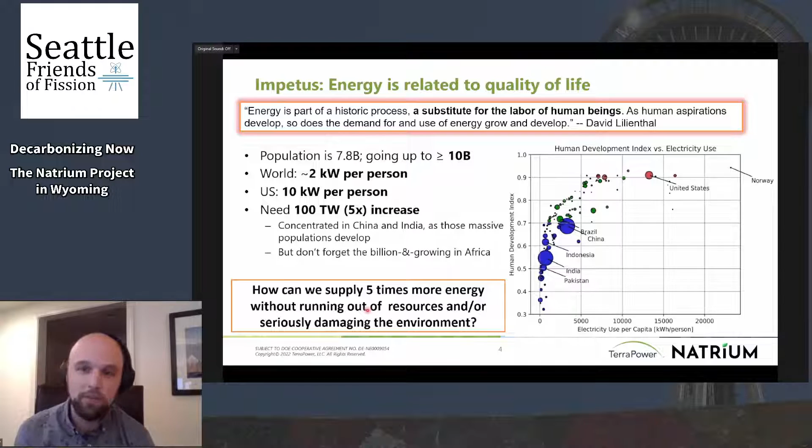When you look at the areas of the world with high populations that need improvements, you see places like China and India. But what you don't see here is also Africa, which is also a growing area that needs improvement. So our founding fathers really asked themselves, how can we supply a lot more energy without running out of resources and without seriously damaging the environment? They went off and thought about this for a while and really came up with nuclear energy, and this concept of a traveling wave reactor, which we'll talk about in a little bit.

So the primary goal of TerraPower's start was to look at the benefits of certain types of nuclear energy and figure out how we can deploy those to a product that is globally deployable. They came across the idea of this traveling wave reactor, which wasn't new, but was more theory than engineering solution. The traveling wave reactor is an extension of a breeder reactor, and so they started thinking about breeder reactors and what breeder reactors are. They have some advantages.

They have a long-term sustainability at the world scale from a fuel utilization standpoint. They can reduce fuel cycle costs with respect to both mining and the enrichment costs. And they kind of enhance your front-end proliferation resistance.

The downsides of a breeder program is that there's a high cost to reprocessing, and the reprocessing also increases some proliferation concerns. But with a breeding reactor, you do get a lot of advantages from the coolant type, and the coolant type from the breeder reactors we looked at is a sodium-based coolant. These sodium-based coolant reactors have low pressure, so they are inherently safe reactors because of that. They have high thermal efficiency.

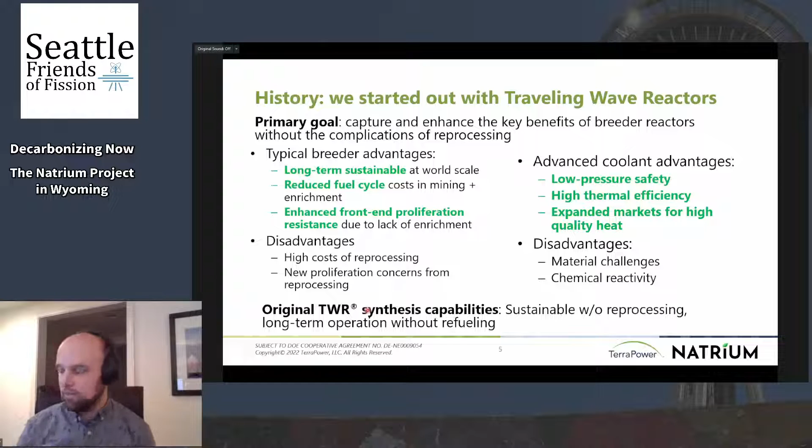So we kind of focused in on these breeder reactors, but we really wanted to take the advantages and not have any of the disadvantages. So we conceptualized this TWR as a breed and burn reactor. And so what is the breed and burn concept?

Well, it avoids reprocessing by basically taking the U-238, which is very abundant in natural uranium, and putting it in the reactor core such that it captures neutrons that are being emitted from the fission reaction, and that U-238 breeds into plutonium Pu-239, and then that Pu-239 becomes the fuel, which we then burn.

And as it moves into that dried region and burns, it is actually drying out the next region. And so this kind of traveling wave, if you will, of breeding and then burning the fuel is what the traveling wave reactor is based on.

And so we went off and looked at this technology for a while and figured out how to implement it using a sodium fast reactor core and reactor systems. And we do that through shuffling the fuel throughout the core throughout its life, maintaining some regions of the core that are breeding up this Pu-239, and some regions of the core are burning that Pu-239 as a fuel.

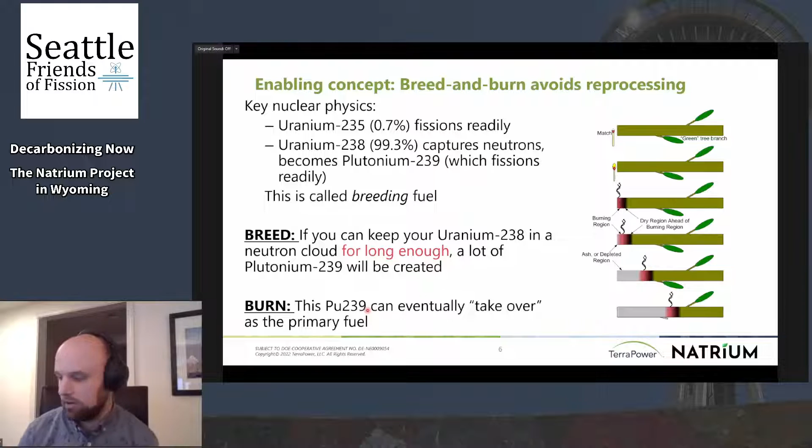Going back about 3 years now, TerraPower reached out and started working with GE Hitachi, which is a company based in Wilmington, North Carolina. GEH, as I'll refer to it going forward, has had a history of developing nuclear reactor technology and deploying it both locally and globally. They have been working on advanced reactors as well. So TerraPower and GEH formed a development agreement and co-developed the Natrium product.

And we really started over from scratch, trying to take the best elements of the traveling wave reactor and GEH's past reactor designs, but really focusing on the future energy markets and trying to design the technology to be very cost competitive and simple. We really wanted to design the product to have rapid constructability because we know that being able to deploy this technology quickly is important.

Current nuclear reactors have an issue with really, I'll call it bloated staffing levels. They have a lot of staff that costs a lot of money to operate. So we looked at trying to reduce the required staffing levels by being very conscious of staffing during design efforts.

And ultimately, we were able to operate at pretty high temperatures. And so we're actually able to gain a higher net thermal efficiency of our reactor. And this helps with the economic impact that we're able to make with this reactor technology.

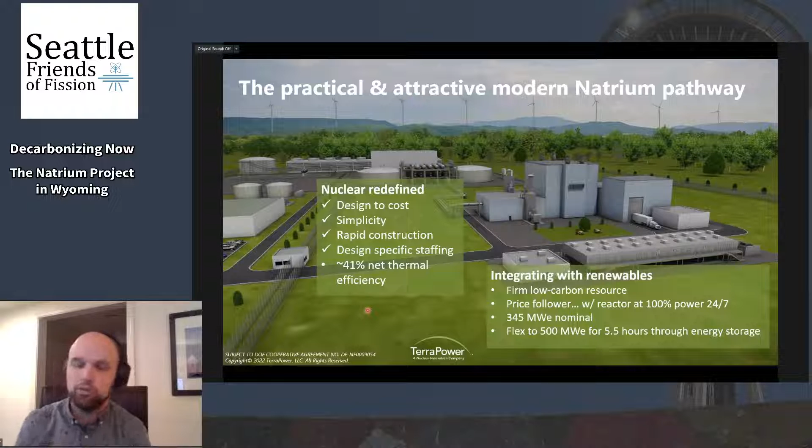So we came up with this concept a couple years ago. We started marketing it to utilities, and then along came the Advanced Reactor Demonstration Program. This is a congressionally backed program really focused on trying to get the U.S. nuclear industry back as a global leader in developing technology. So Congress decided to fund 2 reactor demonstration projects at a very aggressive level, and then a number of R&D projects below that.

So we put in a proposal with a really solid partner group, and we won it. And so this was about 2 years ago. And this program is really set out to demonstrate the ability to design, license, construct, and start up and operate this Natrium reactor. So the program covers all parts of that cycle. And we see it as a real opportunity to build the supply chain for these sodium fast reactors in the US.

And then obviously we are interested in deploying this reactor technology because we see it as a key way to lower emissions by really deploying a fleet of Natrium reactors. This demonstration program will get us our first unit. And then once we're able to demonstrate our ability to design and operate one Natrium reactor, we feel like there's quite a market out there to deploy more.

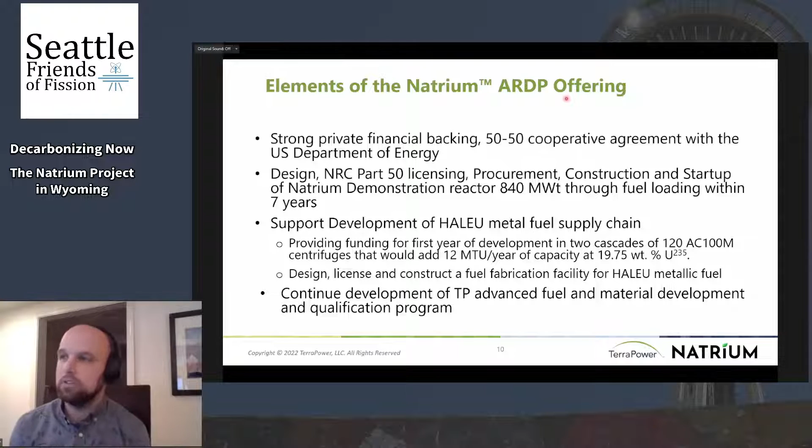And then we really see an opportunity to deploy this at a fleet level throughout the U.S. And so we see that the next step in the Natrium program is a fleet of commercial reactors, which we're demonstrating with the demonstration reactor being deployed in the next decade.

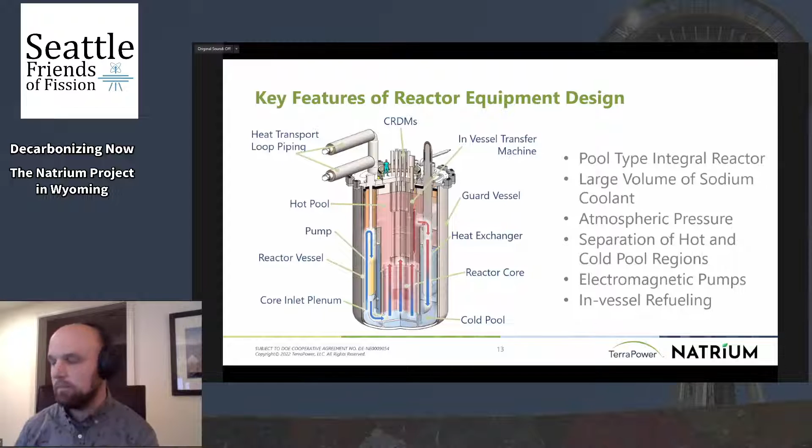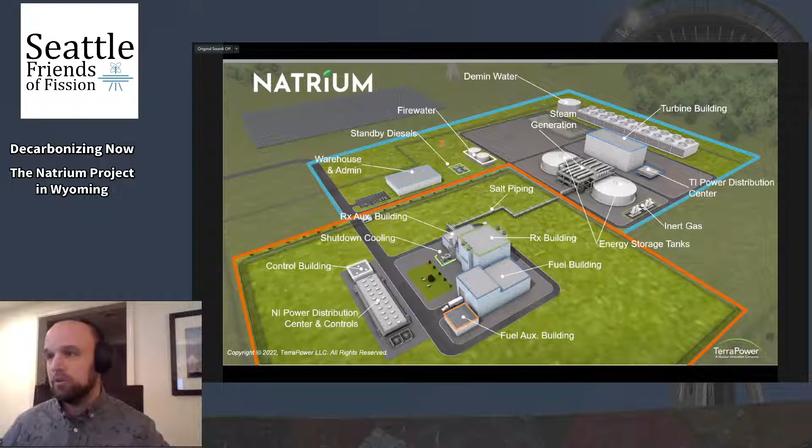And I think that's it. Also shown are things like warehouses and admin buildings. We've got standby diesels and fire water protection and whatnot. But this is the Natrium project, and this is what we're going to be deploying in Wyoming, and ultimately, hopefully, deploying elsewhere as a fleet application.

Wonderful. Let me see if I can get to some of the questions. Sure. So I see first one that has probably been answered by now. You're going to connect a steam generator was the question, and part of that was answered in YouTube. Yes, there's going to be energy produced. In fact, PacifiCorp is a partner in this project, so they're producing energy for a commercial purpose.

In fact, Carl, it's a great point. I'd like to maybe hammer it home a bit. Our demonstration project is a commercial power generating plant, and it's a demonstration of that. So we will be putting electricity on the grid come 7 years from now, and we've got quite a bit of utility involvement in our project because we are creating an energy production reactor. This isn't a test reactor or research reactor. We are creating electricity with this.

And I guess related to that, is it correct that the ARDP has test targets involved, or are there no test targets for this reactor? The ARDP is very focused on demonstration of commercial technology. For our sake, we are not developing a test reactor. X-energy is the other company that won the ARDP project. I am fairly confident they're also building a demonstration of a commercial product. So neither of the projects are test reactors.

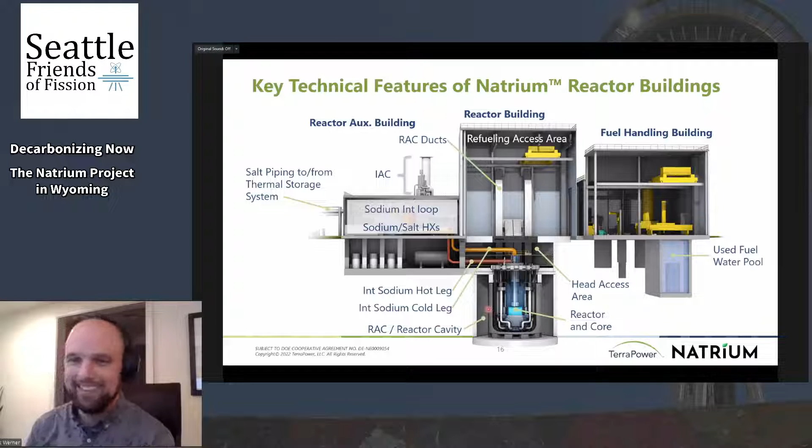Wonderful. Moving on. So that kind of ends the discussion of what the reactor is. I'm going to get a little bit into load following and this energy storage concept, which we think is really valuable as a product in the US. One thing that we recognize talking with utilities is they all have these really big plans for rolling out renewables based on all these zero net carbon initiatives.

They have to deploy renewables, but renewables don't produce energy throughout the day. And so the utilities are looking for zero carbon flexible energy products other than renewables to help offset this renewable energy issue. Nuclear reactors can be that solution, and we feel strongly that they are part of that solution.

LWRs can load follow, and by load follow, I mean change their power output throughout the day. That's what load following is. And in Europe, they're actually required to do load following. They have fairly slow ramp rates, so 5% power per minute. And when you do load follow with a standard reactor, your capacity factor goes down, and that's linked to your economics. So really, by load following, you're reducing the economics if you're turning your reactor down.

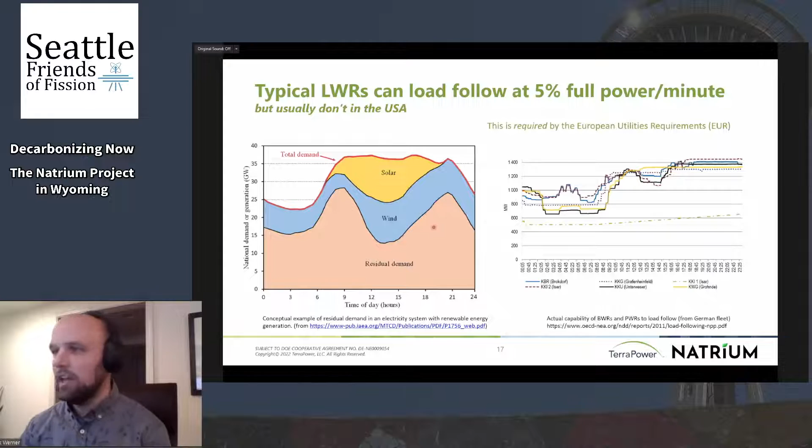This plot on the left shows what's sometimes referred to as a duck curve, where in the middle of the day, you have an excess of electricity, and then during these other portions of the day, you need more, you have more demand. And so this shows the time-dependent demand versus supply that a lot of people who are trying to solve this problem are focused on.

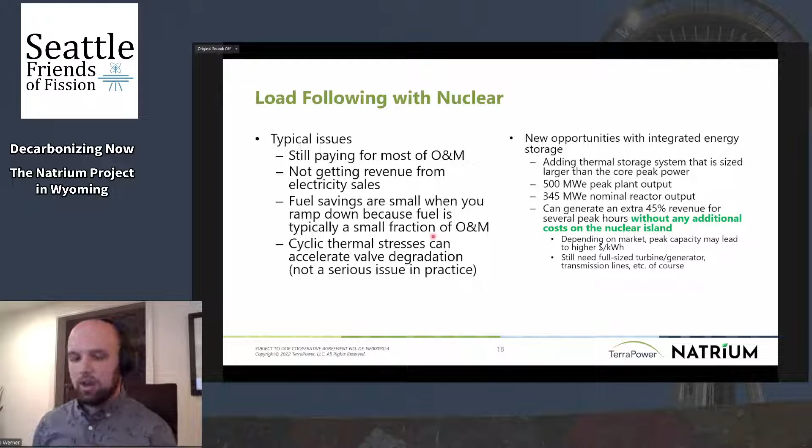I might skip this slide. This talks about some of the issues on load following with a reactor. I'm going to skip it, kind of run along here.

But we are deploying load following through this energy storage system, which is decoupled from the reactor. So a reactor can always run 100% power, and then we can flex the electricity output generation through the energy storage system. And the size of these thermal storage tanks allows us to save up to 5 to 6 hours of electricity, not produce it, and then produce it all at once.

And so we're able to oversize our turbine generator compared to the reactor, and then basically store up energy and then output it at a higher rate. And doing it this way, we're able to actually make more money.

And then we're also able to couple with the renewables, because when the sun's out, solar's making energy, we can not create electricity, store up the energy we're making, and then sell the electricity when the sun goes down, basically, is the concept. How do we do this? It's actually taking advantage of concentrated solar plant energy storage systems. So the concentrated solar plant industry has already implemented large-scale energy storage as part of their product.

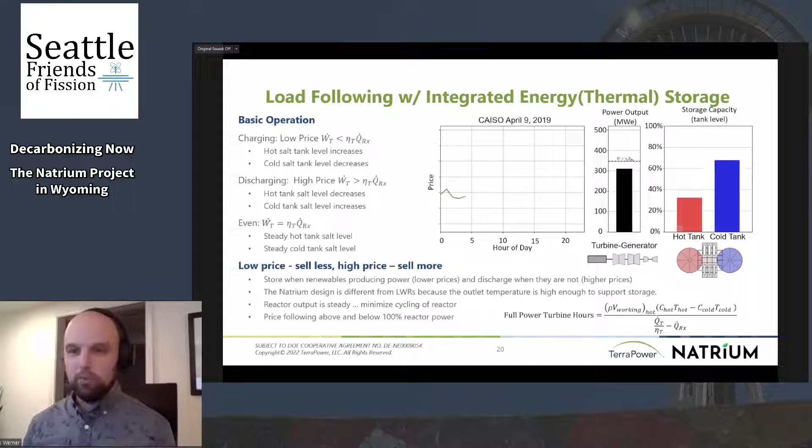So that kind of concludes the load following, price following talk, and we're really excited about that portion of our technology. I'm going to talk a little bit about fuel, and then we're going to get into licensing, and then we'll kind of wrap up.

Natrium fuel: we are advancing the state of the art of the metallic fuel from what it has been operated in the past to a new type of fuel. Traditionally they've used a uranium zirconium mix. We are trying to change that fuel technology quite a bit. Traditionally, they would bond the metal fuel to the cladding with a sodium bond. We are trying to remove that sodium and use a mechanical bond.

Traditionally, the fuel slug was cylindrical, and we're going with an annular fuel slug, and both of these technologies, along with a fuel cladding chemical interaction barrier, allow us to get to really high burnups per fuel. So this is part of our previous TWR fuel technology that we're now deploying in Natrium. By advancing the fuel shape and the fuel form, we're able to get to really high burnups, which creates an economic competitive advantage and actually makes this sodium fast reactor technology competitive with other energy sources.

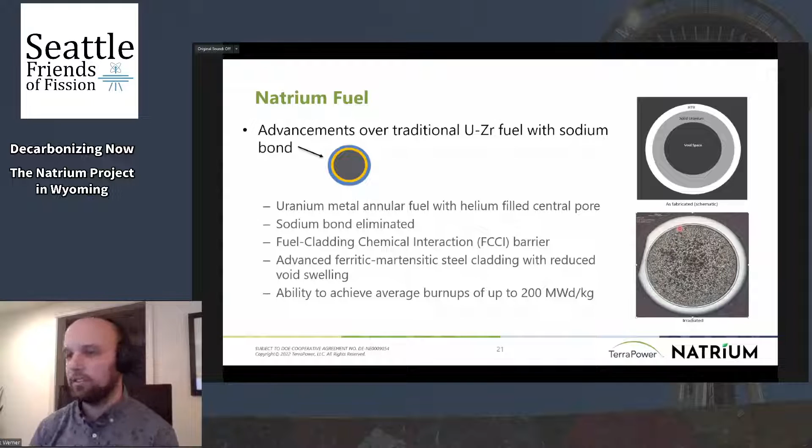So we're able to really significantly increase the lifetimes of our fuel. This is part of the TWR story. The longer the fuel can last, the closer we can get to that pure breed and burn concept. And so this is a really big step in that direction. TerraPower has been developing fuel for a while now. Like I said earlier, since 2009, so that's about 13 years.

We work heavily with the national labs. Up here on the right is shown FFTF, where they've done a lot of fuel testing in the past. We are working with INL at the TREAT facility, which is a transient facility where we're doing transient testing of our fuel.

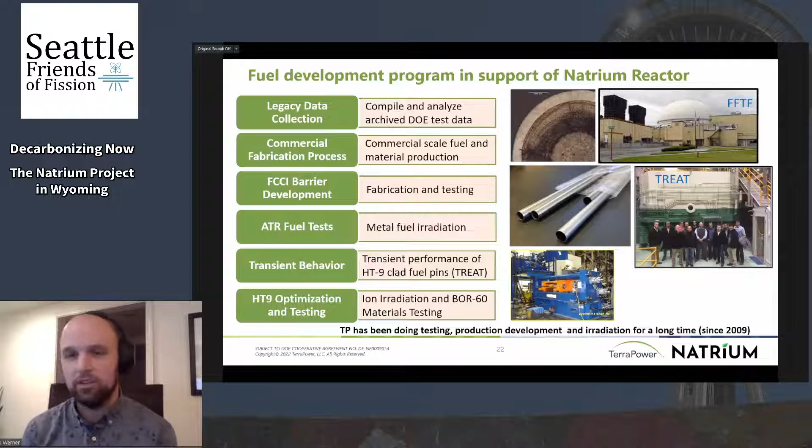We have worked with vendors on developing manufacturing capabilities of our fuel cladding, which is a specific type of stainless steel called HT9. And we've done a decent amount of irradiation testing, both in the ATR, which is at INL, and at BOR-60, which is in Russia. And so we sent both our fuel and our cladding to different test reactors to get testing information done so that we are confident that it will work for the demonstration project.

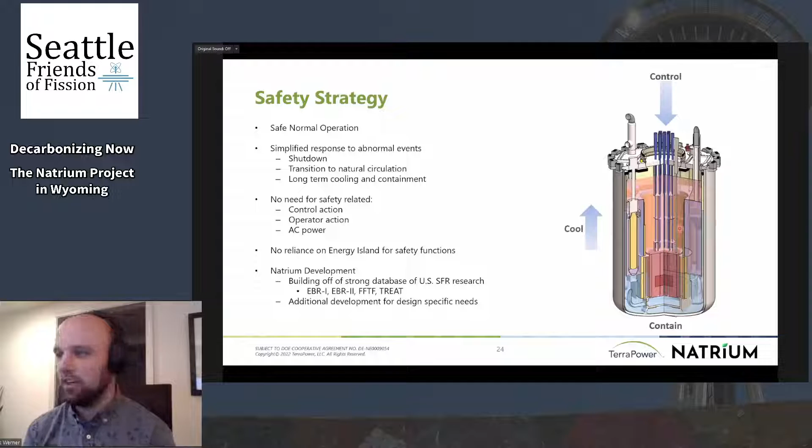We've actually covered a lot of the safety strategy, so I might go quickly through this. I will point out there's 3 key elements to safety for a nuclear reactor. It's control, cool, and contain. You basically need to control the reaction, you need to cool the reactor, and you need to contain the products, the radionuclides. So all safety strategies kind of start with those 3 words. We call them the 3 C's.

So, how do we control the reactor? As I mentioned earlier, we've got control drive lines that are connected to control absorber bundles, which are in the core. If something happens, we can scram the reactor. We basically release the absorber bundle, and that's shown here. This hook releases this bundle, and that inserts in the reactor. That's based on gravity. If for some reason that doesn't work, we generally deploy a motor runback of these mechanisms. That means after we scram, we run the motor all the way down to force the control rod into the reactor. So that's a common practice.

Another important point is that in our sodium fast reactor, based on the neutronics of the core, we only really need to put 2 of our control elements into the core to shut it down, and we've got 13. And so from a backup standpoint, a bunch of stuff can go wrong and we could still shut down the reactor. This is a little bit different than the LWR world, where they have to insert all but 1 to turn off the reactor. All we need to do is put in 2. So it adds to the robust safety case of our reactor design.

And then the last point is something we talked about earlier that Carl brought up, is that we do have an inherent feedback behavior of our core. We have both temperature and power reactivity coefficients that can return the reactor to a stable state after some unprotected extreme event. And once again, the thermal expansion portions are both the axial and radial expansion of the fuel and the core structures. So that's our safety case surrounding control.

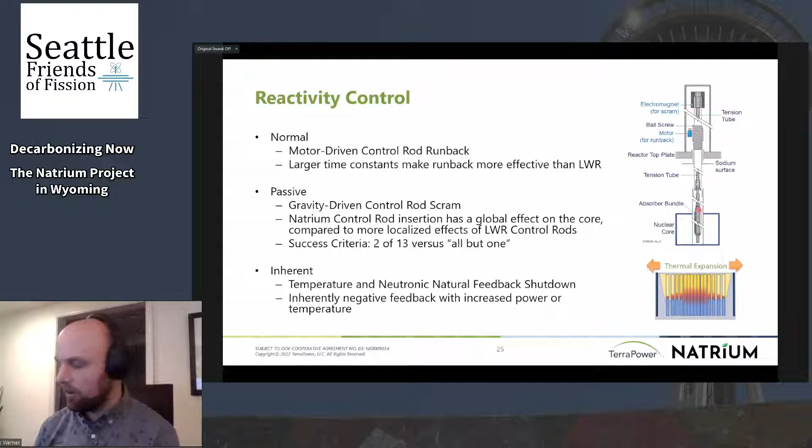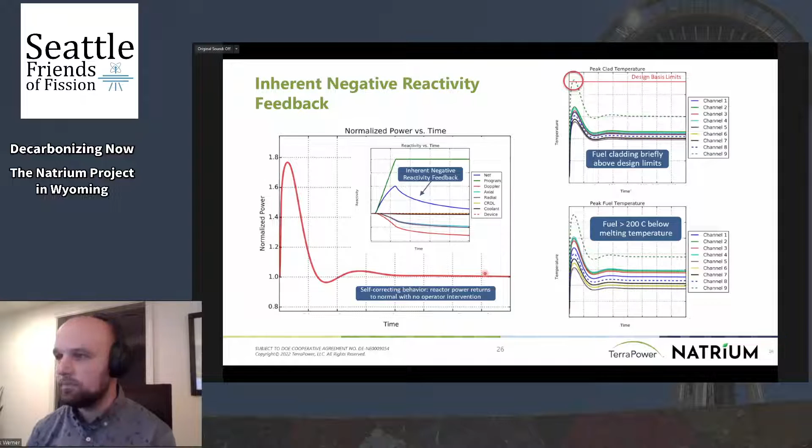Cooling is something we talked a little bit about earlier, but I'll reinforce here. We've got a number of ways that we cool the reactor core. Under normal operations, we're actually taking that heat off and dumping it in the storage tank. So that's normal operations, how we generate electricity. We do have a heat removal system on our intermediate loop that can directly remove heat. We take advantage of this from an operation standpoint. When you start up and shut down the reactor, it's nice to have locally controlled heat removal equipment. So that is on our intermediate system, and it's called our intermediate air cooling system.

But all of our safety-related decay heat removal is this RAC system I talked about earlier, the reactor air cooling or reactor auxiliary cooling, 2 names for it. That is always on, and it's really just a natural draft flow, no operator action. So very robust, and something we can always count on. And this graphic shows the air path of this RAC system, how it comes in from the outside through the ducting, goes down to the reactor cavity, comes up around the reactor vessel, and then leaves the reactor vessel through similar ducting.

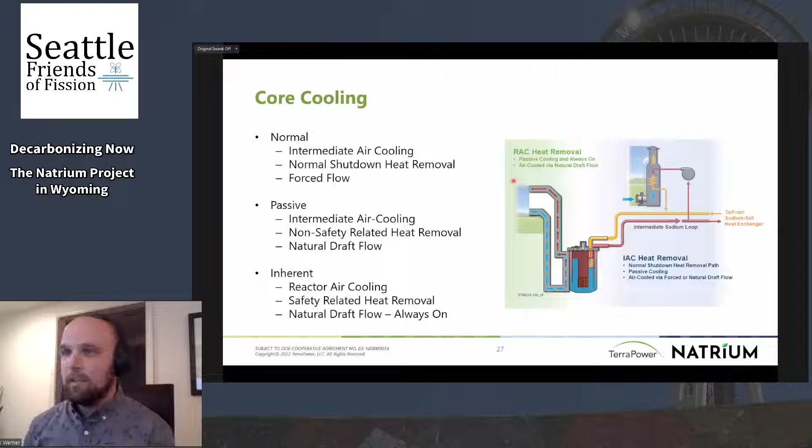Containment, and how we contain stuff is through a containment strategy. And so we've got a number of barriers for containment. Once again, our primary systems are all low pressure, as I mentioned earlier. So there isn't a pressurized reactor vessel that might break. It's low pressure, so the probability of the reactor vessel itself failing is very low.

The primary system's all within a reactor vessel, so we're not circulating coolant outside of our reactor vessel, which helps our containment story. We do put an intermediate coolant into our reactor, but that intermediate coolant is a closed loop, so we're able to turn that off if something happens. There's a high compatibility between our fuel and the sodium itself, and so if there is an issue with our fuel, the sodium itself really likes to hold on to a lot of the radionuclides. It has an affinity for it. So a lot of the radionuclides, which is what you're trying to contain, kind of remain in the sodium.

We do have a containment strategy that relies on multiple barriers for containment. And as I said, the fuel, the reactor vessel, and the structures immediately surrounding the reactor vessel all play a role in these multiple functional barriers for containment. So that kind of wraps up the safety strategy.

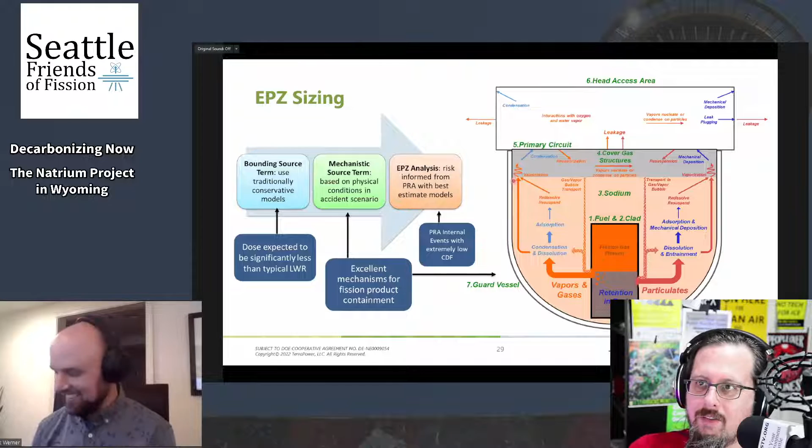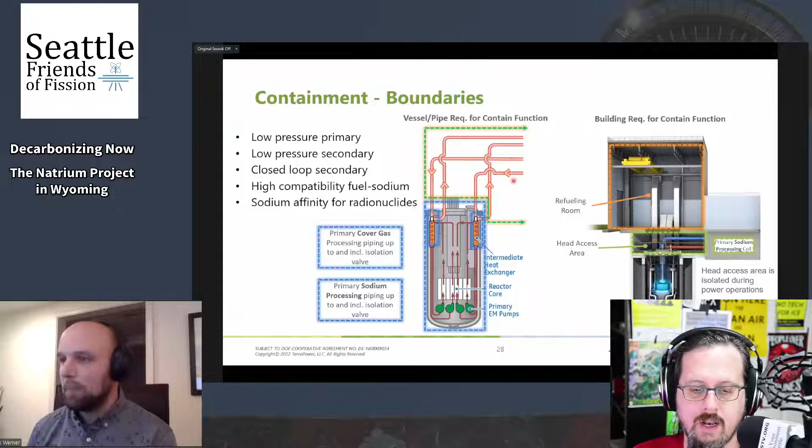Carl, are you going to say something? Yeah, I've run into quite a few questions in chat regarding the containment of the sodium. So is there a risk with that reactor if there's a leak in that vessel? Is there a risk of a fire, and is there a strategy for preventing that?

Okay, that's a good question. I might. Sorry, I'm just going to skip around.

It's a great question. So once again, sodium is our main coolant in the reactor. So in the case of a sodium leak, I'll go on this slide. First of all, where is the leak coming from? There's probably a couple places where sodium can be leaking. It can leak out of the reactor vessel, and so we have a guard vessel that protects against any leaks out of the reactor vessel. There's an annulus between the reactor vessel and the guard vessel, and that is an inerted space, inerted with argon, an inert gas. Sodium doesn't catch fire if it's in an inerted environment. So if sodium was to leak out of the reactor vessel, it would go in the space between the guard vessel and the reactor vessel. It would not catch fire because there's no air or water in there.

If we have sodium coming through these intermediate transport piping, we do have guard pipes that surround these pipes. And if sodium was to leak, it would go into the guard piping, and much like the guard vessel, that is an inerted space, and there would be no fire there. And so from a design philosophy standpoint, any piping that contains sodium that leaves our reactor generally has a guard pipe around it, and the space between the guard pipe and the normal pipe is inerted.

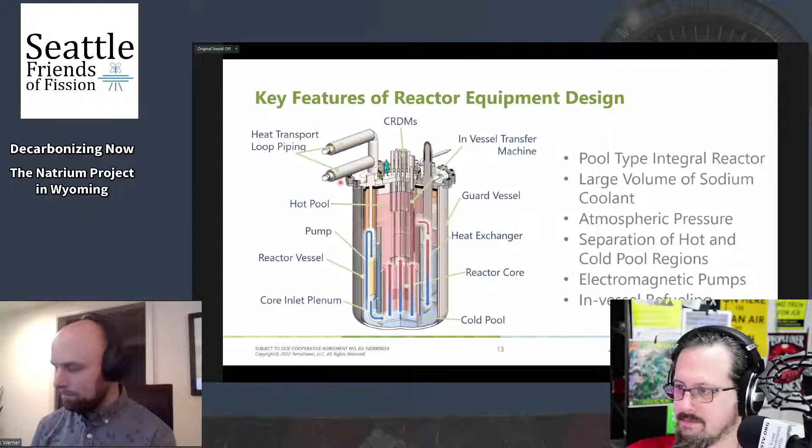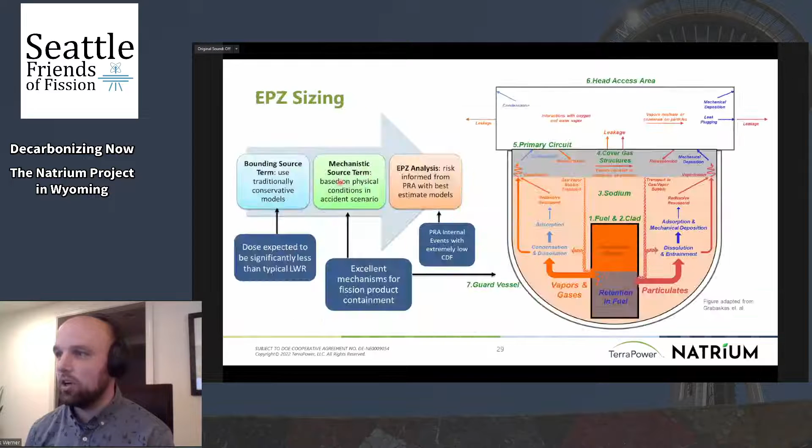All right, it's 8:10, so that kind of concluded our safety strategy talk. Just for time's sake, I'm going to skip over EPZ. I'm going to get a little bit to the licensing approach, and then I'll open up for more general comments. Licensing strategy, like we talked about before, we're doing a 10 CFR 50 licensing process, and that was really due to the time requirements on the program. It was the thing that made sense. It's a two-part process. We submit an environmental report and a construction permit, and the construction permit application includes a preliminary safety analysis report. That goes off to the NRC for review.

Before this, we're doing lots of engagements with the NRC. We're engaging with them right now officially. We're doing presentations. We're providing topical reports. So there's a lot of interaction before this first application. And the whole reason for that early regulatory engagement is really to get out in front of any key issues that we might think they have. So generally this application, this PSAR, shouldn't be the first time they're seeing anything, because we should have already told them something ahead of time.

But right now we're meeting with them every couple of weeks, talking through different topical issues and really teaching them about our reactor design, because they are not necessarily experts on our technology, but we need them to become very knowledgeable about our technology very soon. So a lot of this is actually education for them.

So we submit the construction permit application. Hopefully that's about a 2-year turnaround before they approve it. And then a couple of years later, we submit an application for operations, our operating permit, and that will include our final safety analysis report. And so these are our two big submittals as part of this 10 CFR 50 licensing approach.

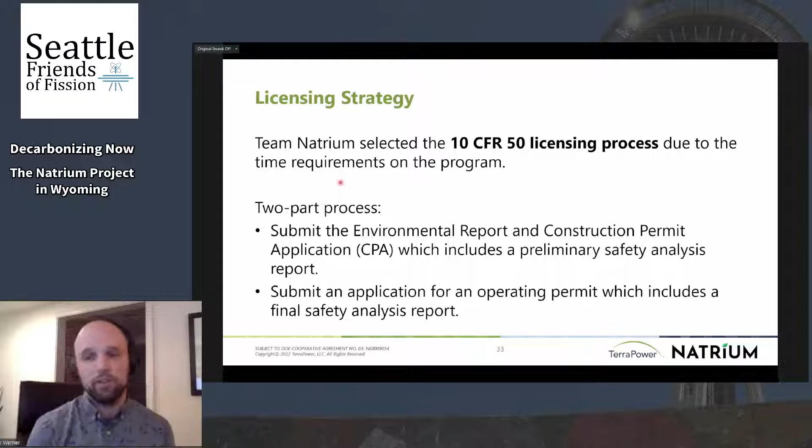After you submit your PSAR, you kind of continue to design and work on your reactor. And then our operating license application and our FSAR would be submitted the following year. And then hopefully a 2-year turnaround on that. And we would receive our license to operate March 31st, 2028. And that is basically the time constraint put upon us based on the ARDP project, that Congress decided that they wanted to see these projects deployed in that timing window. So we are complying. So these are pretty aggressive dates.

And then lastly, where are we building it? We went through a pretty decent site selection process. And originally we were looking at a number of different states. We were looking at Washington State. We were thinking about putting it in the Tri-City area. We were looking at Idaho. And we had an East Coast site too we were looking at.

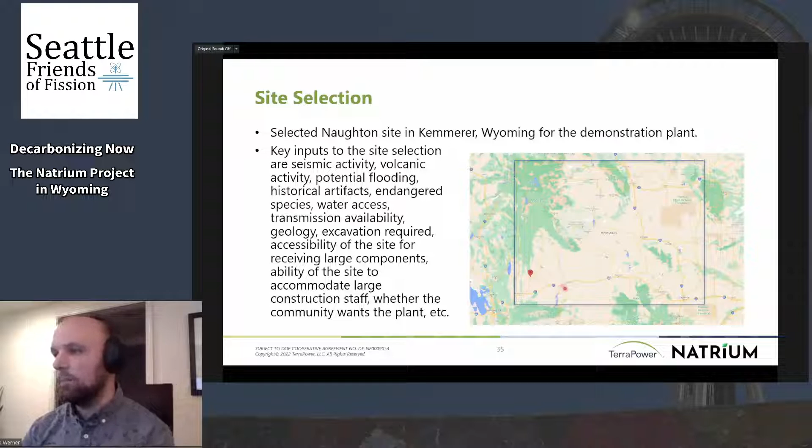Flexibility is something I talked about a lot today. We really like it. It's dispatchable power. This energy storage is something that's only going to be needed more and more as utilities deploy more and more renewable energy. And we eventually think there's a need for process heat, and those energy storage tanks we can use for process heat on top of electricity generation.

In adjacent innovations here, we are applying concentrated solar plant industry technology, which actually helps us deploy this technology quicker. I didn't get too much into the vertical cut technology, but we do think we could leverage the tunneling industry from a vertical cut standpoint to excavate our subgrade structures. And we are leveraging some of the construction techniques learned from the combined cycle gas turbine industry. That industry is able to deploy their technology very quickly, very repetitively, and we're trying to leverage some of that from a deployable standpoint. And I think that's it.